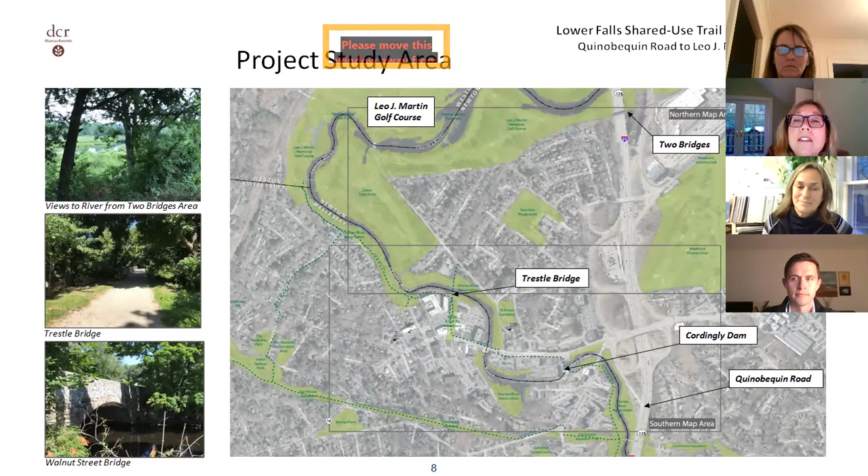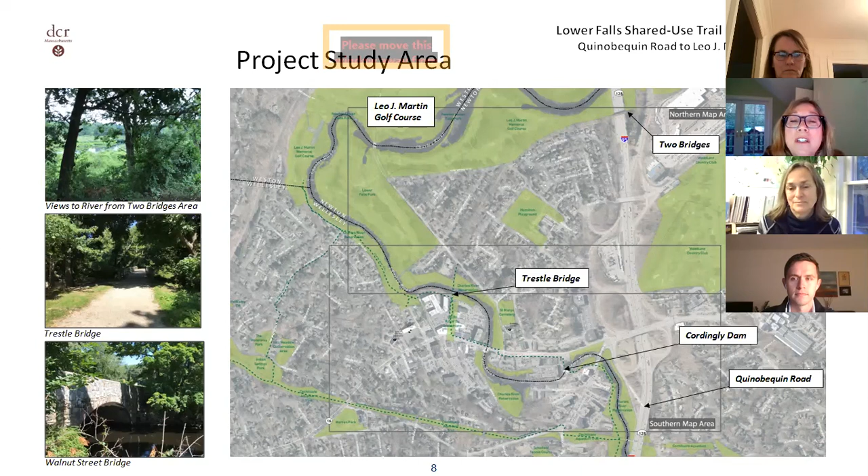The project area is located west of I-95 and south of I-90, partially surrounded by the Leo J. Martin Golf Course in the north and west, and the river defines much of the project area. The landscape is shaped by the river and open spaces in the north, indicated in a box starting at Two Bridges and continuing down to Trestle Bridge. The south area is more urban, but interesting and fascinating, close to the river and near Cordingly Dam. That's how we've broken up the project into north and south.

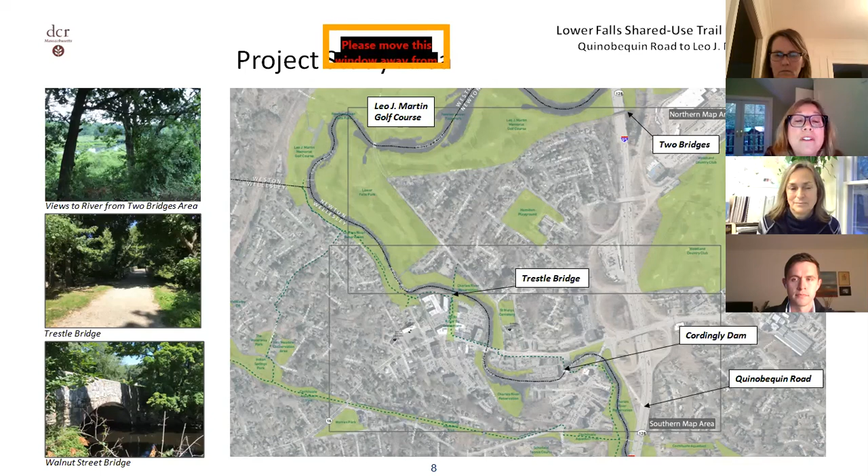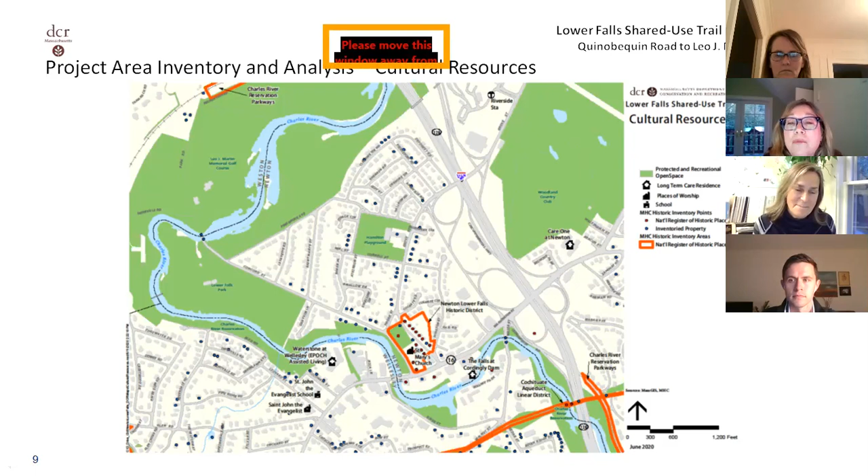We've inventoried and provided a site analysis for the project area. This first map indicates the cultural resources in the area, which is peppered with historic homes, buildings, and sites on the National Register for Historic Places. One thing to note is that Quinobequin Road is on the National Historic Registry and is a DCR-owned roadway, shown in the lower right of the screen in bright orange. There's a lot of interesting things happening in this Lower Falls area.

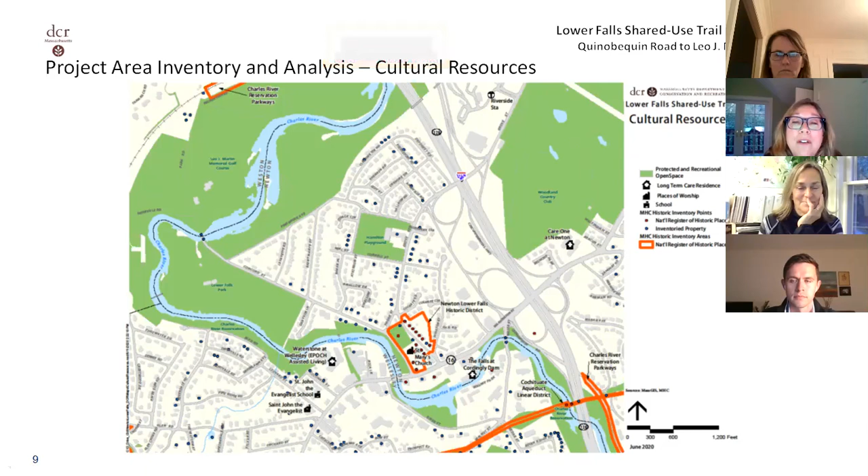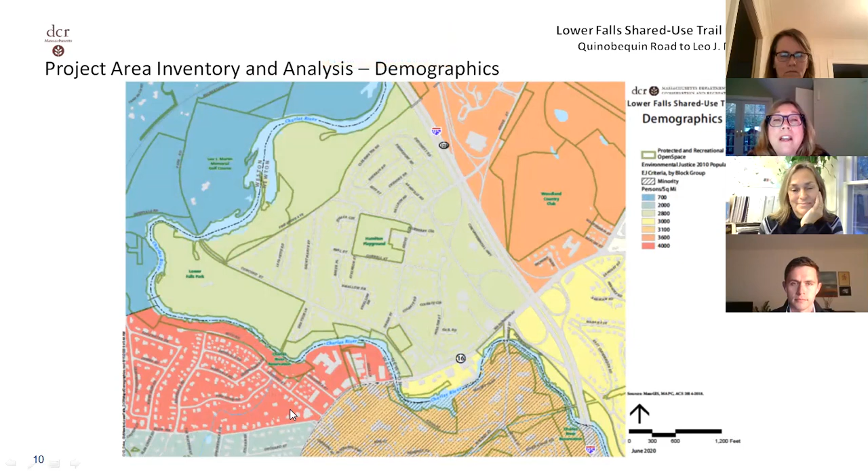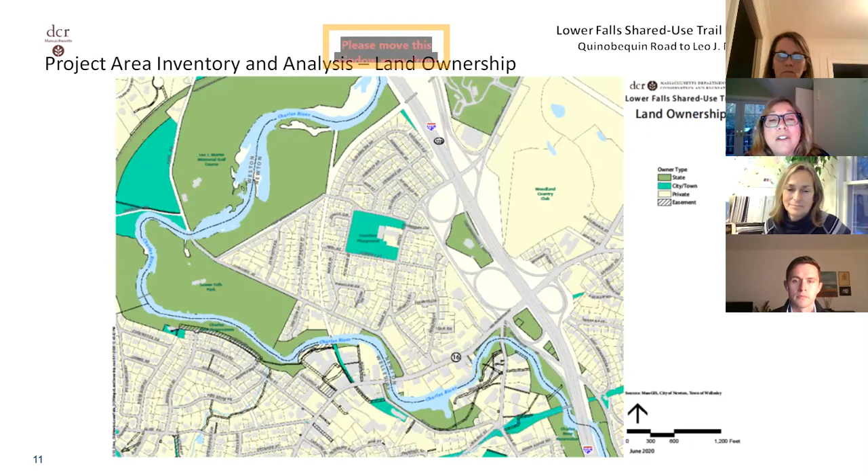As mentioned before, the northern section is encompassed by the golf course, which highlights the area and gives it a wooded feeling, so the landscape is very different there. As you get closer to the interstate and Washington Street, the density increases, but there's quite a bit of open space, including DCR property, along the whole project area.

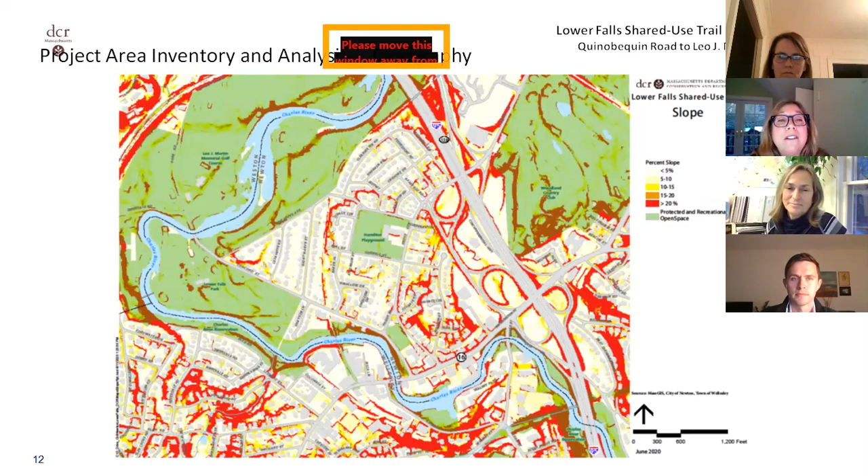We've also got the challenge of water resources in this area, and we really strive to consider the water resources and the implications of building on or near them. So we've aligned our shared use trail to be sensitive to these environmental issues and concerns. As you can see, the Charles River has a huge impact on the area.

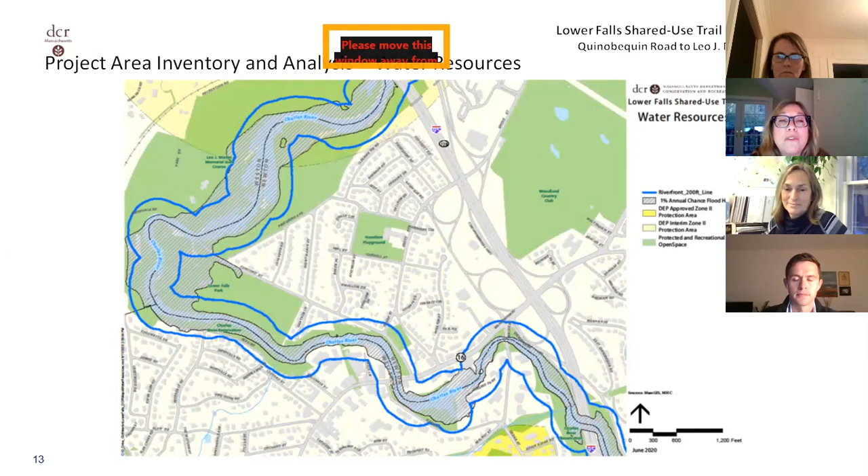Utilities is another important aspect of the project, and the main utility that impacts the site is the brick sewer easement that extends from Pine Grove Ave up to the Charles River. We've evaluated the trail in terms of utilities as well.

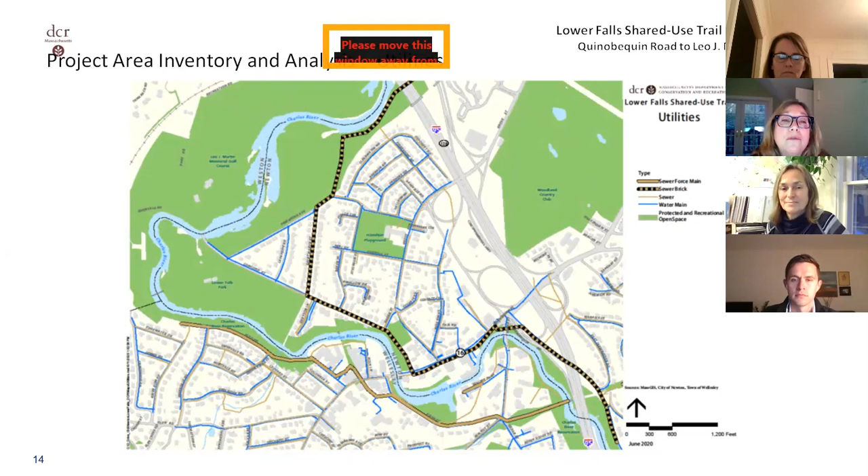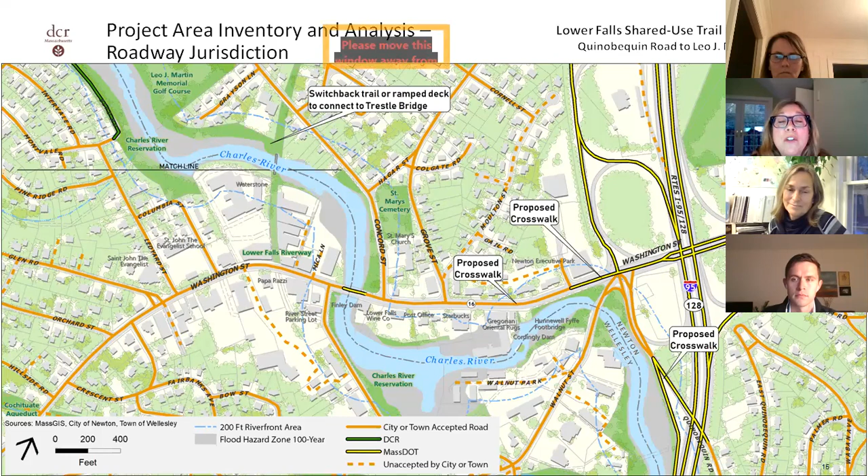This map shows the jurisdiction of the roadways. Washington Street is a combination of MassDOT, shown in yellow highlighted with a black outline, and municipal ownership. MassDOT owns the roadways from the interstate and part of Washington Street, plus the bridge crossing the Charles River. The rest is owned by the town and city, and there is some DCR land. So we realize moving forward that cooperation and coordination will be key for developing the shared use trail, especially along Route 16.

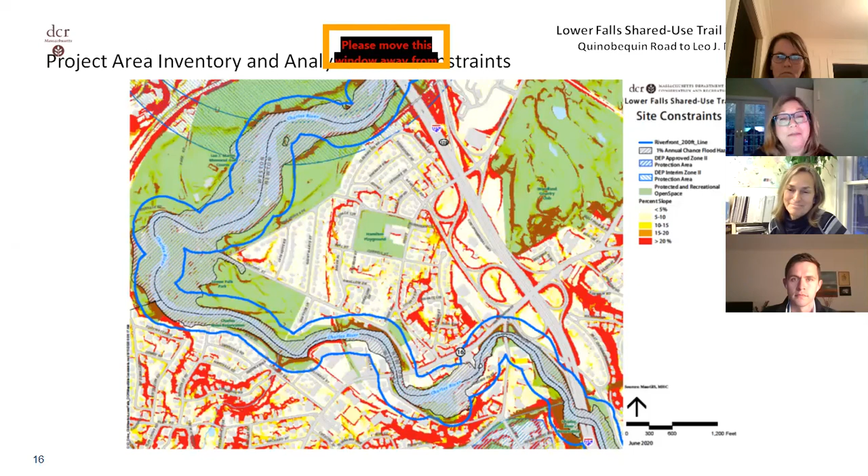We have this compilation... okay, on to the alignment.

As mentioned earlier, we've divided the project area into north and south. The north area extends from the Two Bridges, at the railroad bridge crossing I-95 in the north, and this site area is defined by the Trestle Bridge in the south and the Two Bridges in the north. We've proposed an alignment extending from the Two Bridges to the west along the existing railroad right-of-way, shown as the dashed blue line. That's a fairly consistent slope, already graded pretty much, so it's a good place for an alignment reaching the Two Bridges.

At the point where Pine Grove Avenue takes a sharp turn, we transition onto the golf course and provide an accessible shared use trail along the edge of the pine trees. This allows for beautiful views to the river and really makes you feel like you're part of the open space.

You get to really enjoy being out in this beautiful wooded area. At Concord Street, we propose crossing in the approximate area of the current golf cart crossing, then back onto the golf course amongst the pine trees, wandering and meandering through the trees as the grades dictate, so that we disturb the area as little as possible while providing a safe and accessible way through.

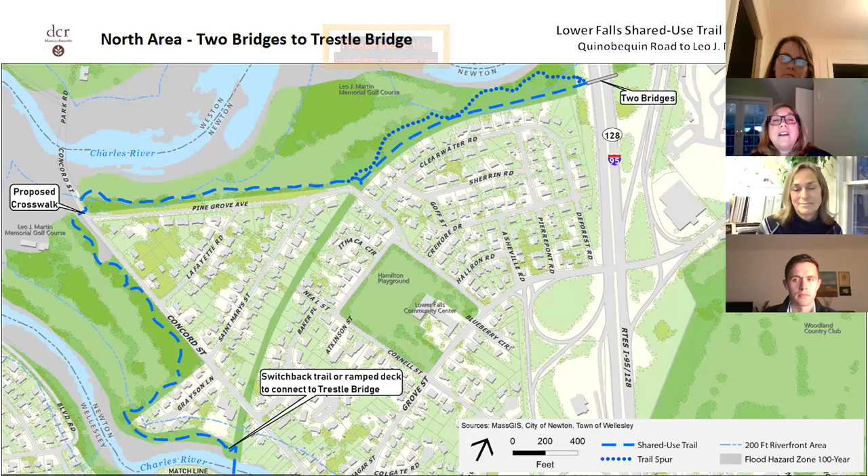This trail would be accessible too, but we'd have to get up to the elevation at the two bridges via switchback trails or a boardwalk, similar to what we'd need at the Trestle Bridge. Next slide.

Okay, and this is the south section. The south section, which you can see where it connects to the Trestle Bridge, extends along the existing Charles River.

This is an easy connection that already exists, and it would be designed to provide as much of an accessible way as we can.

And then we meet Washington Street, and Washington Street is, as I said before, owned by the city, the town, and MassDOT, so all of these owners will definitely chime in on the design of this.

Newton has expressed interest in utilizing the south side in one direction and the north side in the other, to meet up with a project they're working on in the east. So this scheme shows the main shared use trail would be on the north and south, and it can connect down to the southern side, to Quinobequin Road, to continue on the south.

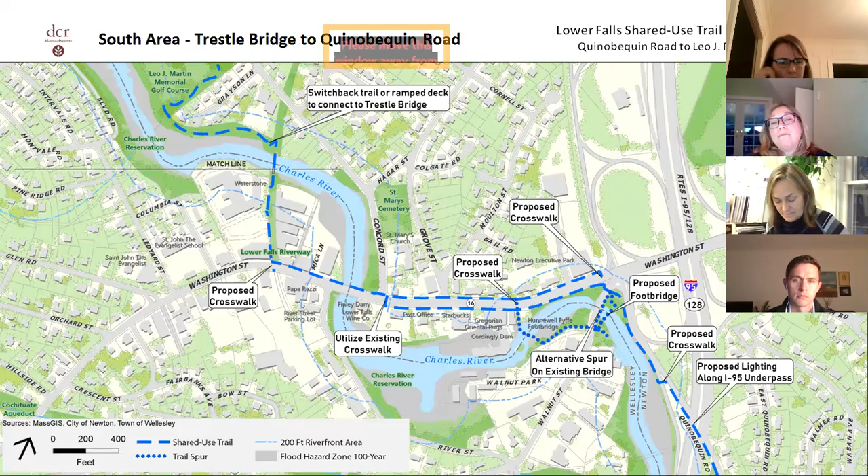Another option is to follow the bridge on a bike trail along the bridge, then meet up at the intersection and head south along the upper bank of the Charles on the western side of Quinobequin. Next slide.

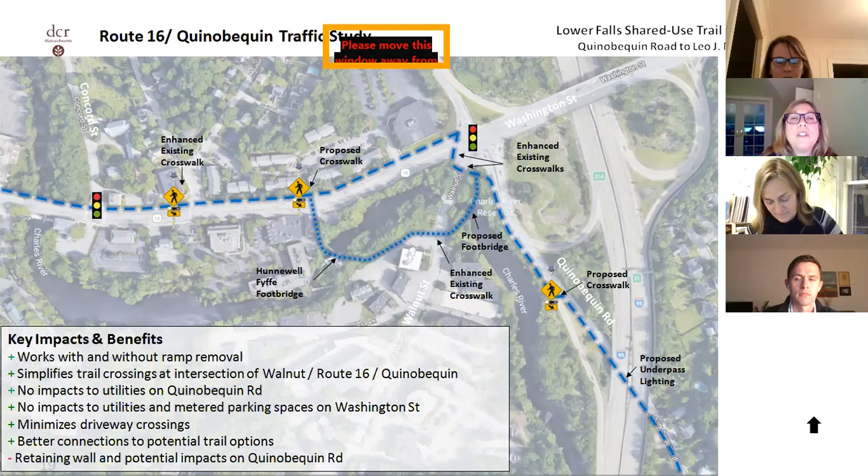We've done some traffic studies, and this study shows the various locations where we looked at improved and proposed crosswalks, and how these spurs would meet up with the trail and how the main trail would work at the intersections. This is an overview of Washington, Quinobequin, and Route 16. Next slide.

This is an aerial of the spurs I was talking about before, the proposed footbridge, which brings you low to the water but makes you feel like you're in a different place, even though you're surrounded by roadways. It's a very beautiful spot, a great place to really enjoy the river and feel like you're close to it. That would be a special spot.

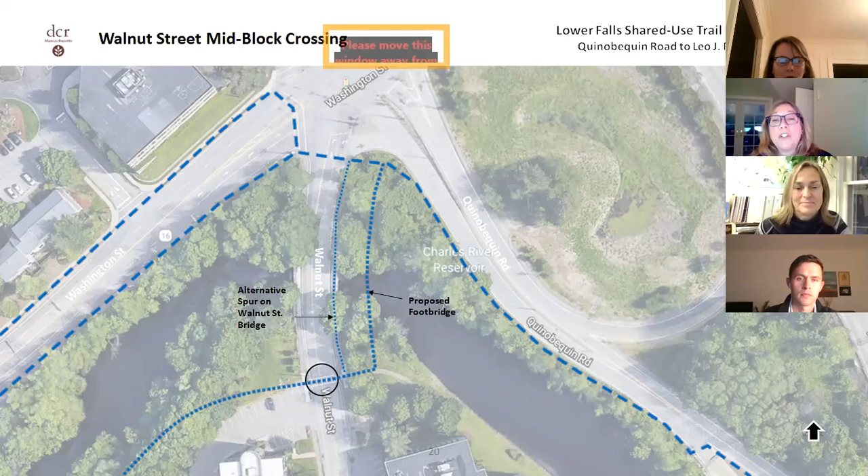Another alternative is to bike along Walnut Street and then meet up with the trail at the intersection of Quinobequin, Walnut, and Washington. Next slide.

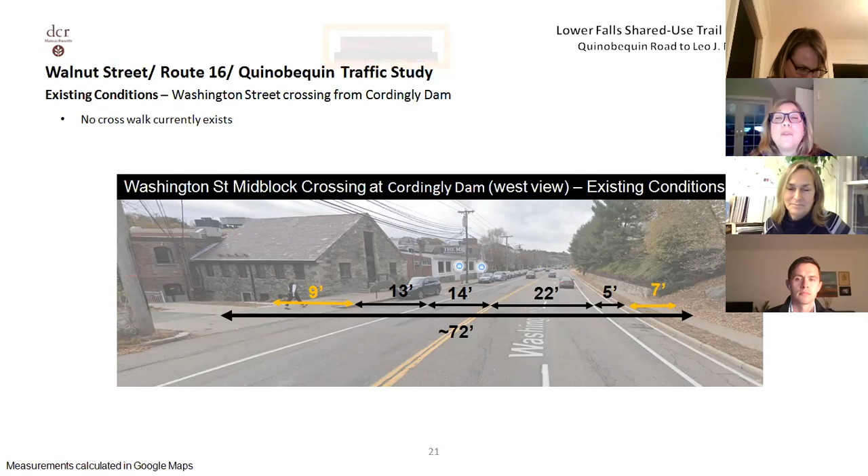So this is the crosswalk - there's no crosswalk here. This is the cross section where the Cordingly Dam pathway meets Route 16, and you can see there's quite a bit of real estate to work with. This would be a location for a crosswalk to bring people from the north to the spur that leads to the dam and the falls, and then around to the south. Next slide.

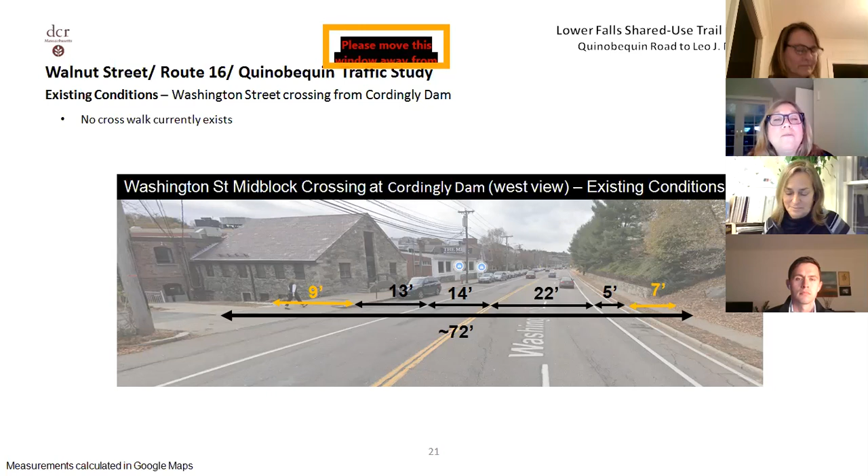This is the existing conditions at Walnut Street. The crossing there exists, and it would be controlled if we go ahead with this scheme, but this is an opportunity to get people across Walnut Street and down to the river.

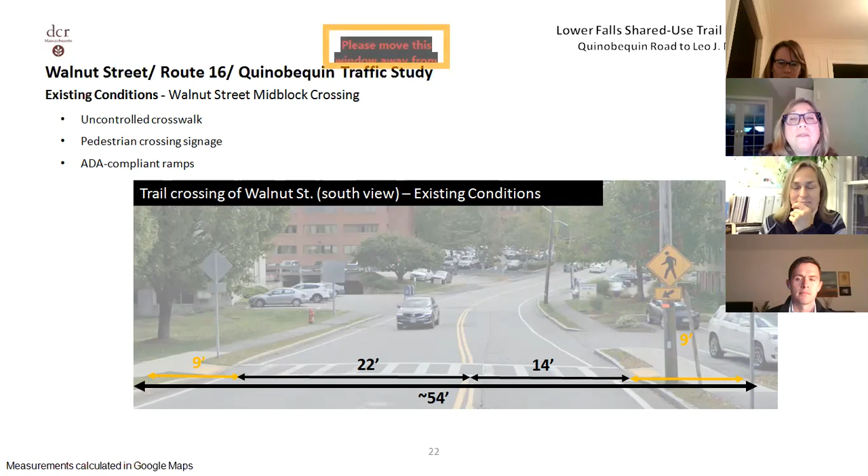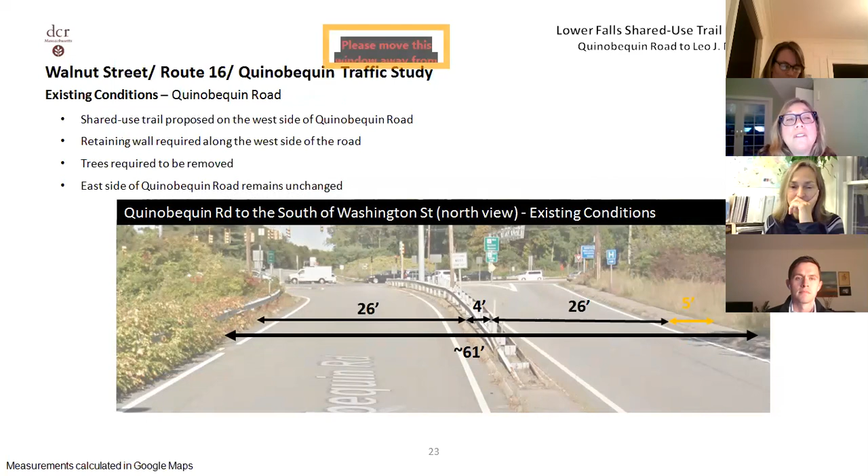We're going to be moving from north to south along Quinobequin, but this is the existing condition along Quinobequin. It again shows that there's quite a bit of real estate, and that there is an existing walkway along the east side. So we have a lot of opportunity here, and the river's on your left. We're going to keep moving south.

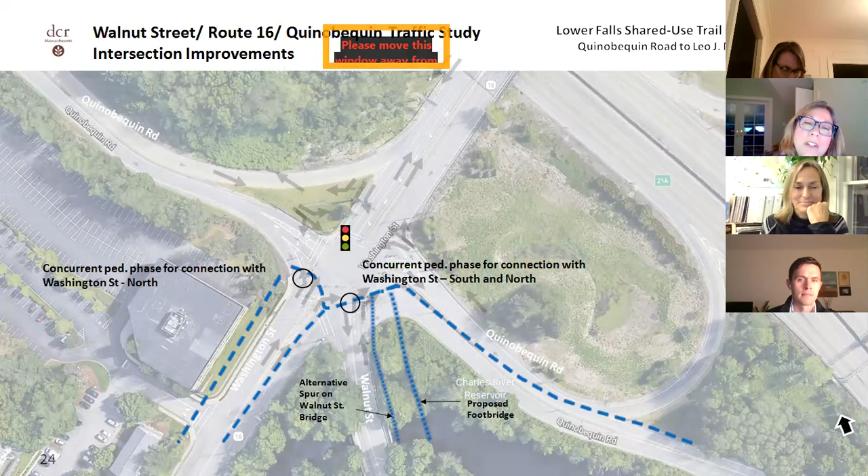This shows the alignments again of the spurs on Walnut Street and then the proposed footbridge.

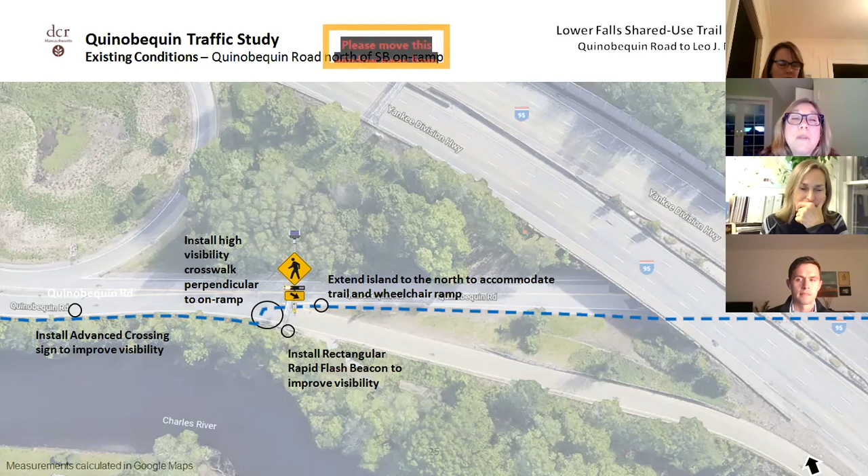This slide shows the opportunity to create a crossing at Quinobequin from the east side of the river, the upper bank, across Quinobequin to the west side of Quinobequin and heading south. So the proposal is to install a high visibility crosswalk and improved, not just improved, but new pedestrian crossing signals to accommodate people safely.

Then we're headed south on Quinobequin. Again, you can see the existing conditions and the amount of real estate we have to work with, which is doable for incorporating a shared use path into Quinobequin.

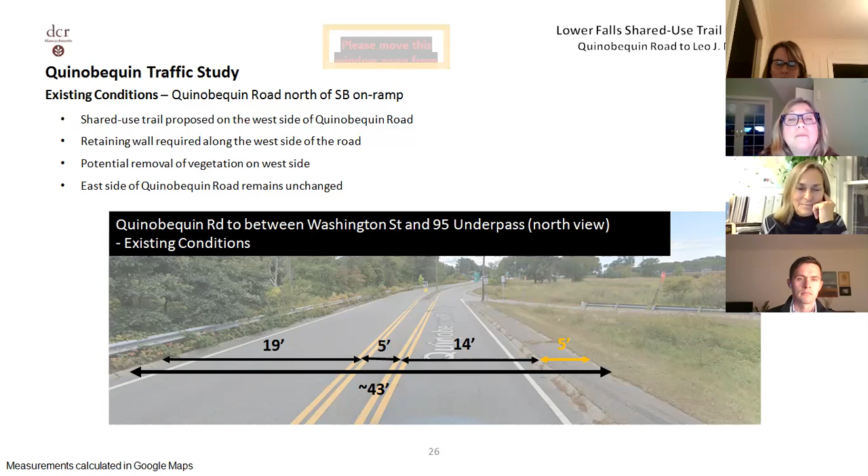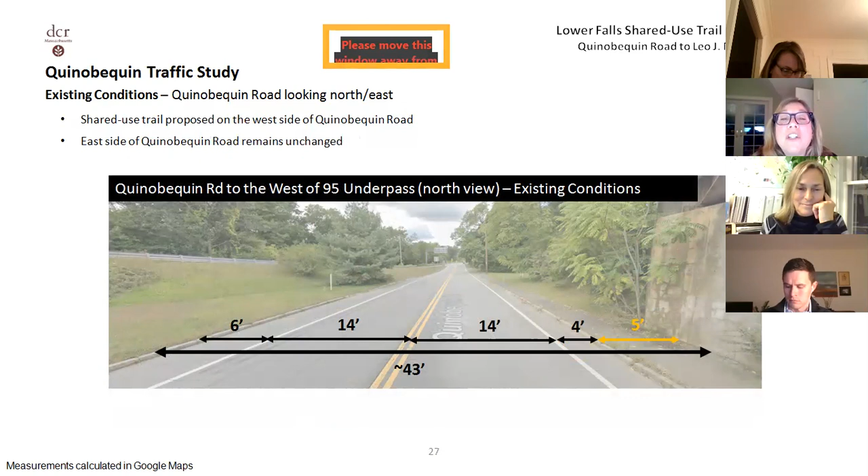And this is the entrance to the underpass. Again, you can see the dimensions will allow for more pedestrian and bicycle use here, and we can create a safe passage here.